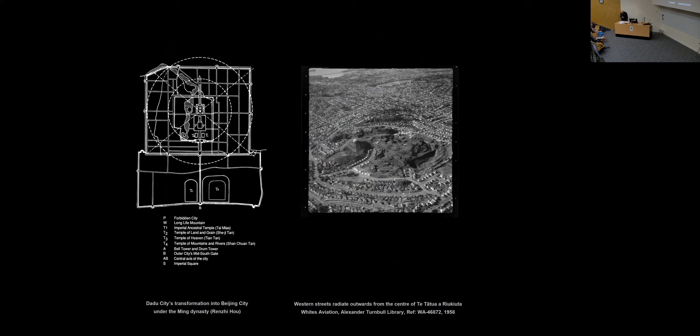The streets on the western side, immediately in the foreground, took their line from the volcano's features, fitting between or around the cones, the crusted edge of the lava lake, which is here, going forward, and the walls of the tuff ring, which are here.

Looking closer at the western side's radial street pattern, we see new state housing being introduced to the suburb in the 1940s, with a mixture of 1- and 2-storied duplexes. What's distinctive about the arrangement for me is the narrow plot divisions for each property, which you can see in the area between the houses on the wall or the slope of the tuff ring itself. I'm not aware of any volcano in Auckland which has been subdivided in this way. Note also the use or potential use of this slope for food production.

We can see the power of the divine order of Three Kings in this view, with the volcano sitting at the head of the grand axis. We can also see the large-scale quarrying of the scoria cones for roading material. This began as early as the 1840s and significantly upscaled in the 1950s. At the same time as the city plan was consolidating the position of the volcano, its presence was being quarried away.

Seen today, 4 of the scoria cones and all of the scoria mounds have disappeared. So too have been lost almost all of the earthwork, stone walls, pa, middens and urupa associated with Maori occupation. Only Big King is left, which is here. Now Te Tatua a Riukiuta chiefly refers to this one remaining cone.

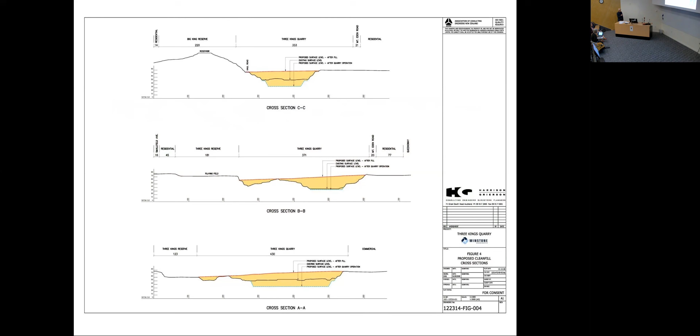In 2011, the Environment Court granted Fletcher the right to clean fill the quarry. Fletcher and the community agreed to new fill levels, close to adjoining ground levels, remedying the worst effects from quarrying, including covering over the quarry access road. Here's the quarry access road. So the levels almost met adjoining ground levels and covered over the worst effects of the quarrying.

In 2014, Fletcher applied to rezone the quarry for residential development. However, Fletcher's master plan left the quarry 15 to 17 metres below street level. Fletcher believed the lower fill level would increase the number of houses and shorten the lead-in time for construction. The significant change in final fill level conflicted with the expectations of the local community and the local board, Puketāpapa Local Board, who presumed it would be to their 2011 levels.

The lower fill level fundamentally affects the development's ability to integrate with its surroundings, as well as provide easy access and a walkable neighbourhood. Further excavations are needed to enable access to the floor of the quarry. So that bridge I was talking about has been quarried away to allow an access road down into the floor of the quarry.

So that bridge that connected Big King with the rest of the volcanic landscape has been lost, and now Big King is a standalone feature.

Fletcher's approach to residential development was to develop a typology called cascading apartment typology, which it considers an innovative use of the quarry. What they've done here is take the existing quarry walls, cut them back close to the property boundaries, and then provide 5 to 6 storeys of car parking, with ramps connecting one car parking building to another and another, then sleeving that very large car parking building with one side of apartments.

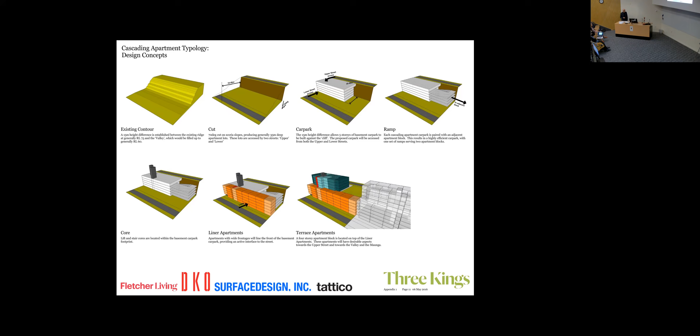So when we look at the master plan, we can see these buildings, 10 of them, around the edges of the quarry, stretching for 750 metres, at 9 to 10 storeys, with a 5-storey building here. So you've got this sort of monumental wall circumnavigating nearly 1 kilometre in length. There are very few visual gaps between them, and only 2 main pedestrian access points, here and here, over 400 metres apart.

On the floor are 3-storey terrace houses and 5-storey apartment buildings, which turn their back on Big King. There's what I call a circuitous suburban street pattern, which creates a lot of road in use instead of potential building. And the open space here provides 2 playing fields and very little other usable open space.

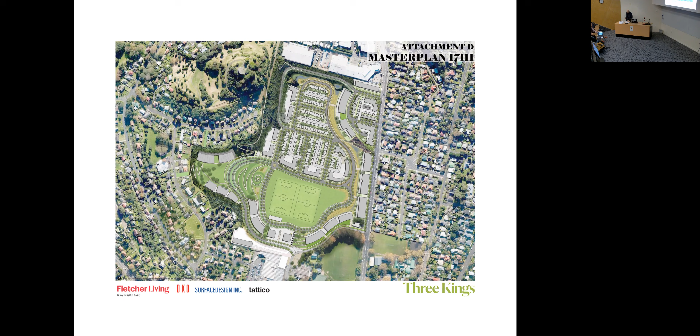Perhaps most importantly of all, this development will not be able to change or be retrofitted over time. The physical constraints of the whole, the inefficiencies of the planning and design, and the energy required to service and inhabit the development are locked in permanently.

Fletcher also applied for and was granted approval to use 6.5 hectares of the Three Kings Reserve in the development. The public land exchange meant that a public good outcome for the community became integral to the development. In essence, if this was only about Fletcher's land, that would be a very different involvement from the community than the fact that public land has been brought into the development.

So we can see the Three Kings Reserve is the green area here. It's not visible from the plan, but this level here is much lower than the town centre and another part of the reserve here. It's about 17 metres below level, and Western Park is about 8 metres below this level. The question raised by the council is: is the land use proposed by Fletcher an acceptable outcome?

You can see most of that reserve has been divided up by housing and by roading, and extra land has been provided within the Fletcher development to create the two playing fields. Amongst many reasons given against the land exchange, the local board argued that Fletcher and council did not adequately consider alternative options for how the public open space could be improved. Where the level difference seemed to be a fundamental limitation of Three Kings Reserve, is there another way of actually improving the outcome for the reserve rather than building residential apartments?

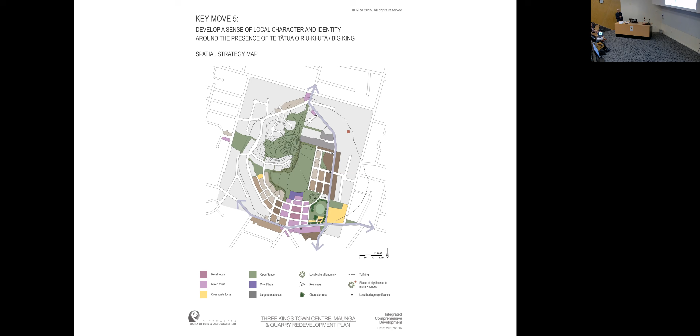And that's what that area looks like. It provides a generous setting for Big King and the recreational needs of the community. Eco services can be incorporated: stormwater management, wastewater management, food production, habitat creation.

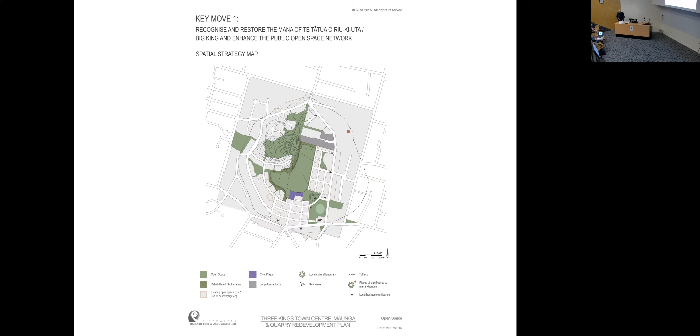When we look at other examples in Auckland, we can see that the provision of recreational open space against volcanic landscapes are very, very successful. You get this very strong interface where there's a complementary relationship between the two.

Conceptually, we saw that open space against Big King as a series of terraces that connect with the surrounding topography. Two key things to note: we lifted the area of the Southern Reserve by 8 metres to bring it closer to the other levels and retained it as public space. We also covered over the quarry access road.

We can see an example in the Auckland domain where that kind of softened contouring creates a very gentle landscape, easily navigated by young children as well as adults. So these higher fill levels dissolve those historical barriers created by the quarrying. All the land is joined together and is continuous, so you get a much more resilient community as a result.

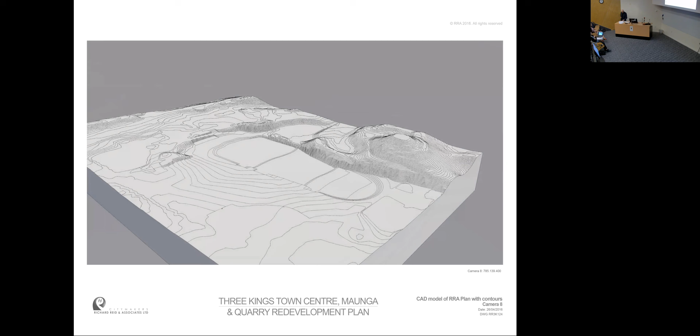The fill level, the amount of fill in our design, is less than in 2011. However, it's obviously more than Fletcher's, about 1 year and 10 months longer required to fill it to our levels based upon reasonable filling rates. However, the Environment Court process lifted Fletcher's ground levels, so that difference isn't so great.

Here we're looking from the town centre towards the playing fields. So here's that overall master plan, where we can see now the buildings, apartment buildings that we've provided, a compact, medium density, mixed use, walkable neighbourhood. Those buildings in brown, which are all on Fletcher's land, are only 4 to 5 storeys high.

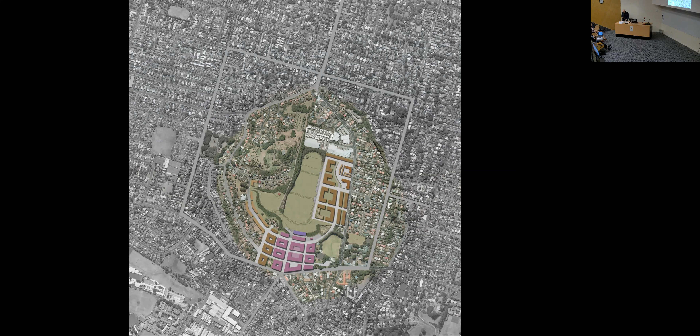And then we've redeveloped the town centre separately, but we've brought them all together as one plan. You can see with the buildings here, car parking in the basements, and just this very strong interface between the buildings and Big King, creating a topography or a townscape with these buildings so that the buildings reflect the volcanic landscape rather than being independent.

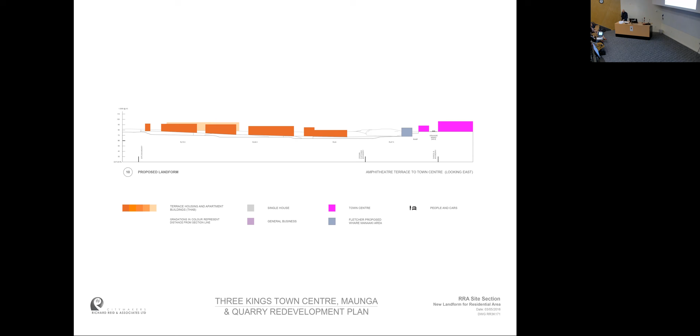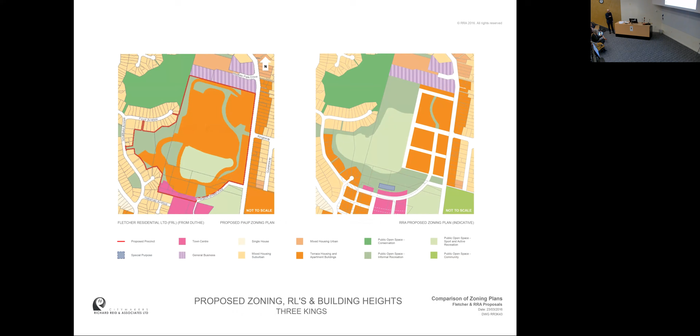So our area is about a third of the total plan change area, and about half of Fletcher's land that we need for development. So what does this translate to in terms of numbers? Well, what we found is that we're getting the same numbers of housing units as Fletcher's had before it entered the Environment Court.

Through that Environment Court process, Fletcher's lost something like 170 units through compromises with the local community, which translates to about $100 million in sales. But we're also getting half the building area, half the roading area compared to Fletcher's, and nearly double the open space. So there's massive investment in infrastructure for the Fletcher development for much less returns for Fletcher, as well as much less returns or benefits for the community.